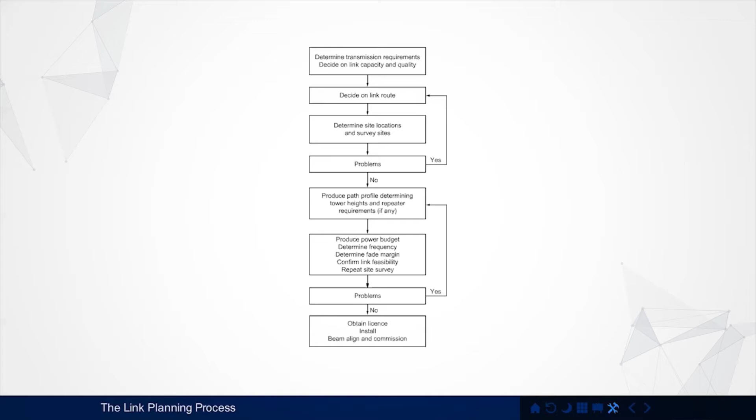Multiple steps, with some iteration in the various steps, but K-factor relates to this stage of the process, where we're trying to determine tower heights and antenna heights, and indeed the feasibility of the link. Will the two radio antennas at either end of the link be able to see each other in radio terms? Can I establish a connection between these two antennas? Is there anything in the way? Can I clear obstructions? That is, in essence, the profiling process: determining tower heights, antenna heights, and the feasibility of the link from a clearance perspective.

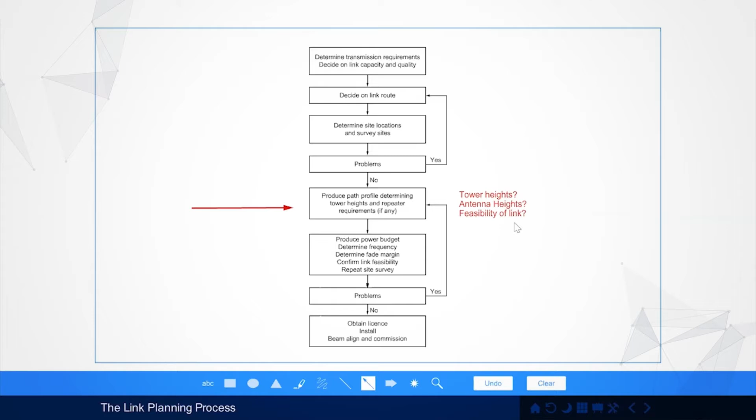Okay, what I'm now going to do is jump to this slide here. Our radio signal is going to propagate through the Earth's atmosphere. Those of you who've been radio engineering for some time, either mobile coverage planning or link planning, will be aware that the medium we use to carry our radio signals is, of course, a natural medium. Being a natural medium, it is not stable. It doesn't behave consistently in one particular way. The atmospheric conditions change over the day, over an hour, over the seasons. If you recollect your physics lessons at school, you might remember refractive index of a medium, denoted by a number. If the refractive index of the medium was 1, an electromagnetic wave propagating through that medium will travel in a straight line. It will not refract, it will not bend, it will not curve.

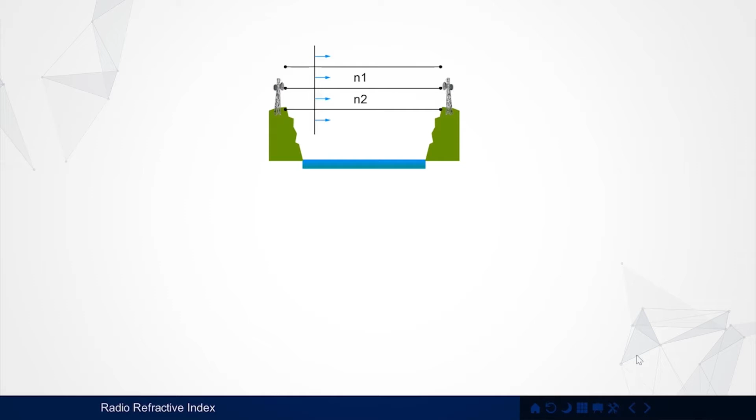As the Earth's atmosphere is not a stable medium, the conditions of that medium will change, and that will cause a change in the refractive index. So sometimes, in a quite simple model here, the higher altitude air will be thinner - I'll dive into this a little bit deeper shortly - and the lower air will be thicker. This, of course, will cause a bend, a refractive element in the radio signal's propagation. It will bend towards the Earth. We consider this thin air above, thicker air below as normal conditions, and that will create a degree of refraction of the radio wave.

Sometimes those conditions will change though, and we get some strange abnormalities, in which case the thicker air can be at the top and the thinner air at the bottom, in which case the refraction will trend upwards. So you can imagine if you have two radio antennas, one at each end of the link, the trajectory of the radio beam between them will be bending, refracting to a degree, up or down, and that will fluctuate through an hour, through a day, and across the year. As radio planners, we need to manage that - we need to incorporate that into our calculations.

Now, I'd like to draw a small distinction here between the scientist and the engineer. If there are any scientists out there, I'm not decrying or hopefully insulting anybody. But I would suggest to you, and I don't know if you agree with me on this, that the engineer is trying to take the scientific knowledge and create a model which will help him calculate, as a best educated, very educated guess, whether the link will perform adequately or not. So we're dealing with these scientific criteria in a practical engineering way, and we have to factor this into our link planning process.

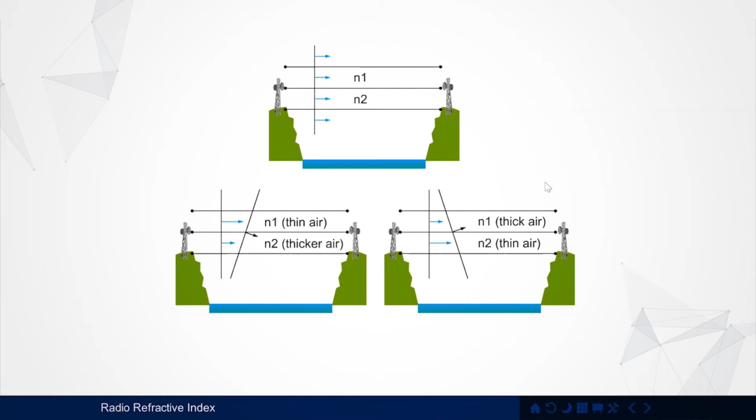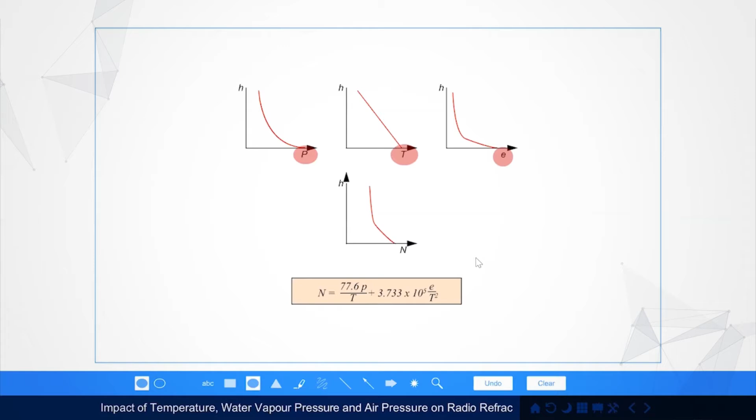Now let me go back a slide. As I've mentioned already, if the refractive index of a medium is 1, then an electromagnetic wave propagating through that medium would travel in a straight line. Now, interestingly enough, the value of n for...

As I've mentioned previously, if the refractive index of the medium, such as a vacuum or any medium the electromagnetic wave is propagating through, is 1, the electromagnetic wave will travel in a straight line.

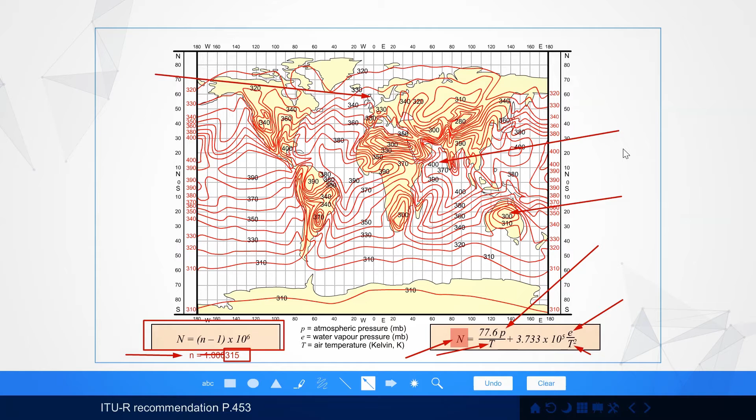It's not the absolute value that is of concern to radio engineers, not the absolute value of N. What is the main concern is the gradient, the change in N with altitude.

So if it was 340 at the Earth's surface, it would fall to 300 by the time we reached 1,000 meters. Over that 1 kilometer of the Earth's atmosphere, it's a linear fall in N under normal atmospheric conditions of about 40 units. So we decrease the value of N by 40 units over that 1,000 meters vertically through the Earth's atmosphere under standard atmospheric conditions, and that creates this refractive impact on the radio signal.

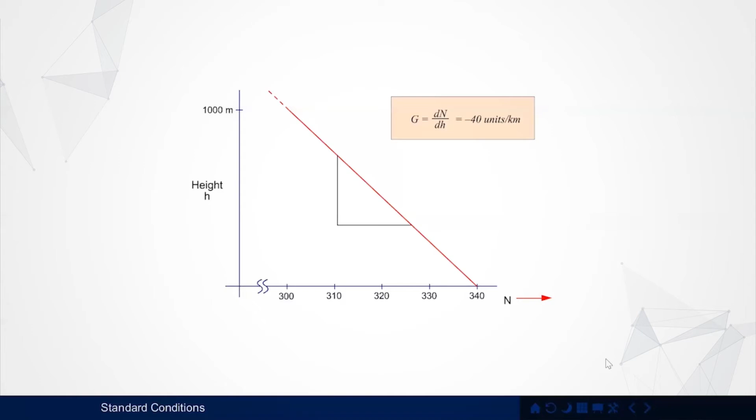So this is the K factor - by how much you must multiply the real Earth's radius to calculate an effective Earth's radius, so we can then draw the curvature of the Earth modified, so we can then draw the radio trajectory as a straight line.

So for the mean value of n, a gradient of n of 40 units across the surface of the Earth, then we take a K value of 1.33. So K is a mean value we can use in our link planning processes when we're plotting our profile. A K factor of 1.33.

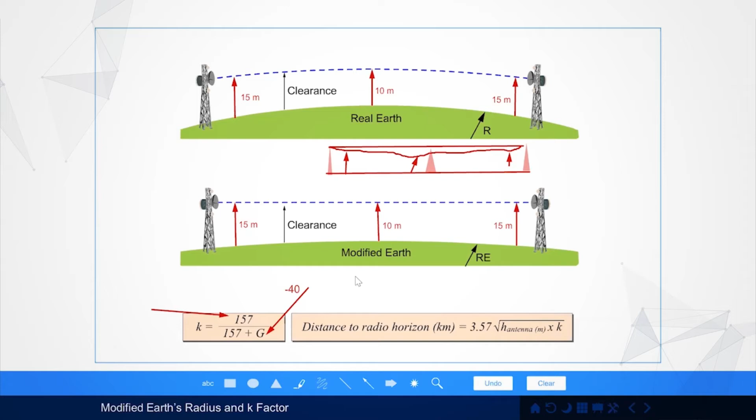Because the weather isn't stable, we're going to get changes in temperature, water vapor pressure, air pressure. We're going to get changes in N, so we're going to get changes in K. So if the K factor was 1 at my location, the meteorological conditions have dictated that the variations in air pressure, water vapor pressure, and temperature have created a gradient of 0. In other words, there is no change of n with altitude.

And in those instances, yes, the radio beam, as you can see in this diagram here, is going to travel in a straight line across the surface of the Earth. There's no change in n, so it's going to travel as a straight line.

Other meteorological conditions, which I've indicated here, like -40, the mean value across the Earth's surface, gives us a K factor of 4/3. So there you can see the curvature of that radio signal over a real Earth. And so on and so forth.

Now, what you will see is if K is infinity, the gradient of n falls by 157 units over 1,000 meters of altitude above the Earth's surface. If you recollect the formula for the gradient, it's 157 divided by 157 minus the gradient. So 157 minus 157 is 0, and 157 divided by 0 is infinity. So if K is infinity, the radio beam will travel exactly parallel to the Earth's surface.

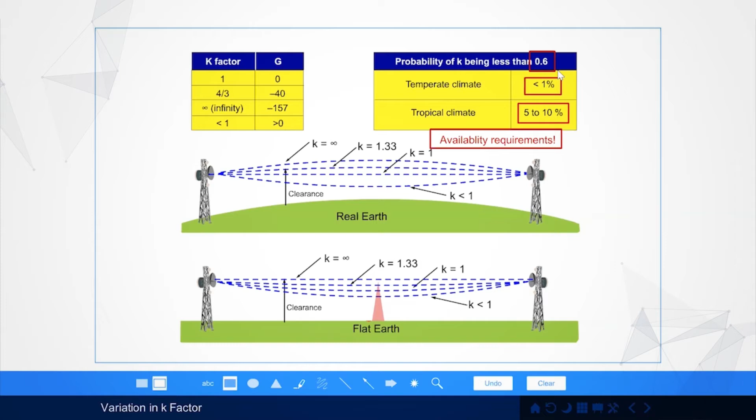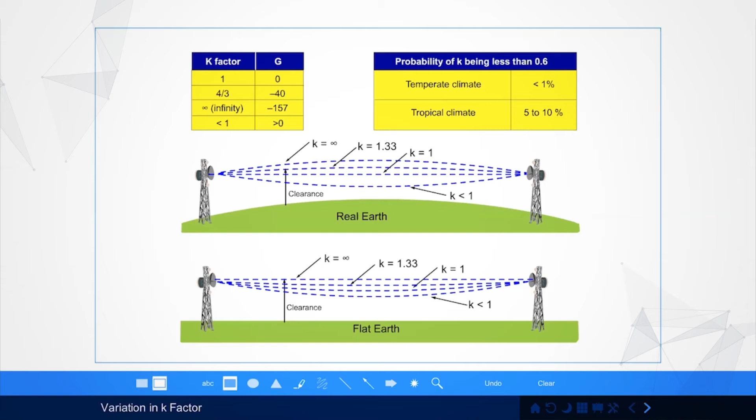Now, very briefly, just showing my age here. If we go back far enough, when I was learning link planning, we used paper like this. Can you believe it? We used graph paper like this. I'll spend 2 seconds on this, 10 seconds on this.

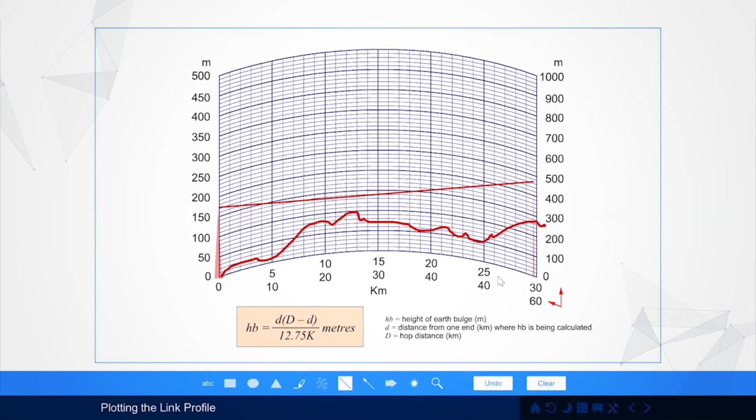So you would plot out your antenna heights on the chart here, and then you would draw the terrain profile in, and then you could draw the radio beam as a straight line. So we've actually curved the Earth's curvature to look like this. This is 4/3 Earth curvature graph paper, so it's curved graph paper for radio engineers.

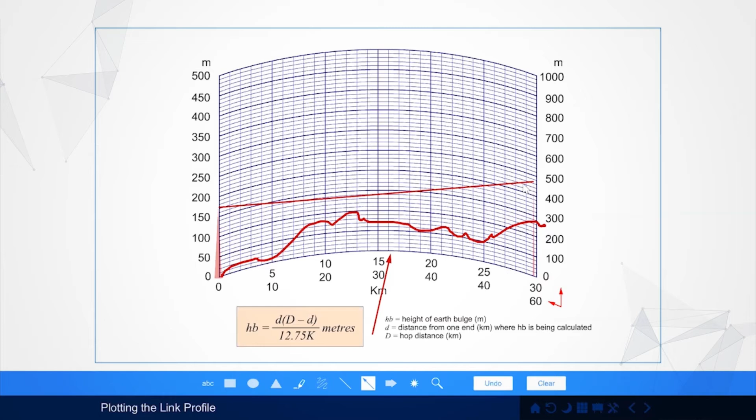We don't use flat Earth, we use curved Earth, altered curved Earth. This is mimicking the Earth's radius multiplied by the K factor. Plot the profile and then plot the trajectory of the radio beam as a straight line, and then we can work out our antenna heights. I'll leave that one with you - we've got software now. Okay, let me move on.

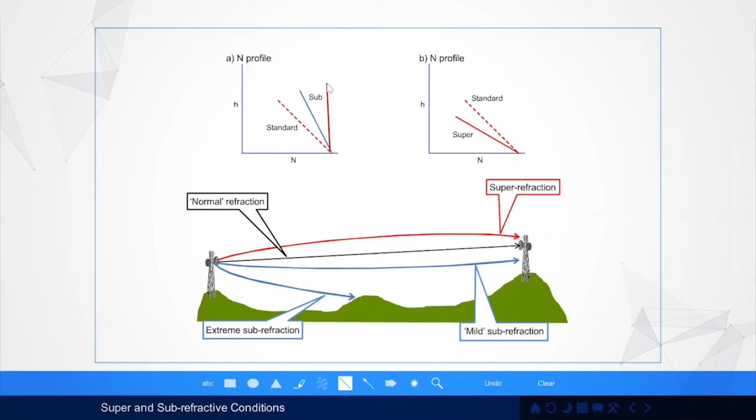It goes over there, that can be disastrous, and this can be disastrous down here. So we can see as this changes, the trajectory of the radio beam will change. That means it'll bend more downwards, or it might overshoot our dish or undershoot our dish, or even disastrously, we can get effects like this taking place.

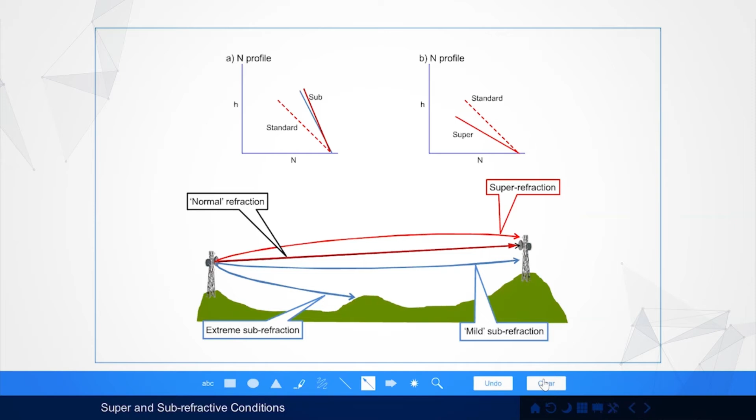Now, the man in the street might say, well, if your radio connection was directly like that, and then the weather changed and it did this or it did this, surely you've lost your link. Now, we don't need to panic. We don't need to panic because over the page...

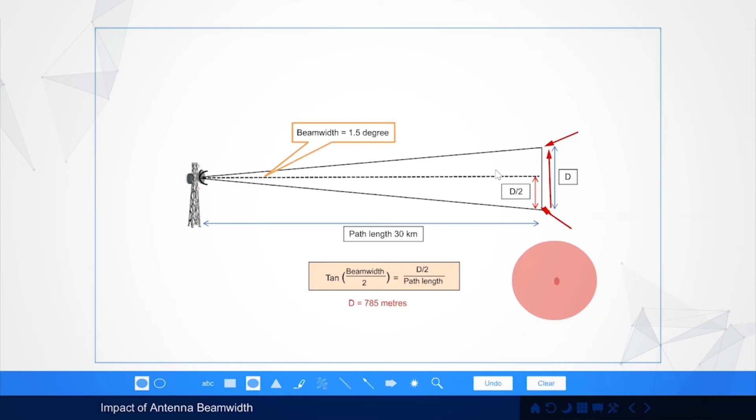Quick, simple mathematics, you can see in this case here, and only this case - you could calculate this for all of your links if you really wanted to - but can you see that distance there, D, is actually 785 meters. So arriving at my dish, I have a circular received electromagnetic field spread over 785 meters with my very small 0.3 meter or 1.2 meter dish stuck in the middle there. So of course I can tolerate some deviation, some refraction up or down is not going to have a major impact upon the performance of my link, as long as it's within reasonable limits.

Okay, so don't panic, the link will still work. Okay, moving on.

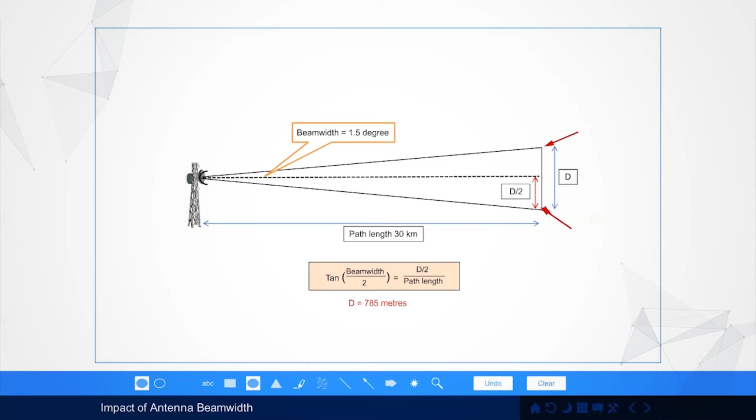I now want to look at clearance. How do we determine clearance? And you might have heard this, if you've been planning for a while, you'll have heard of Fresnel zones, and I'm gonna touch on that topic now. Okay, I'm aware of time, I really do need to move on, but I don't mind overshooting. If you guys can hang around for a while, I'll just carry on.

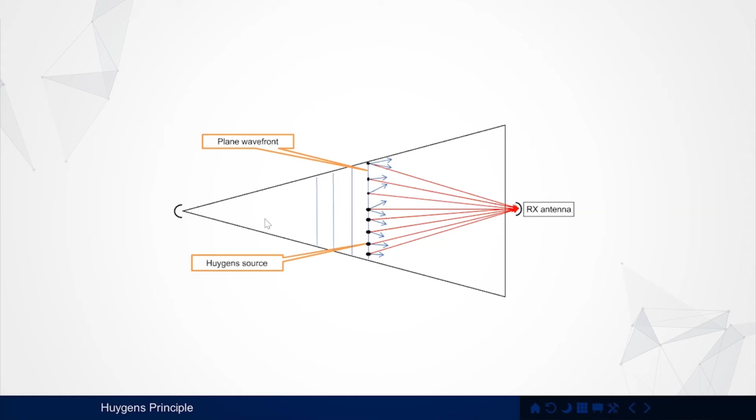Christian Huygens, a Dutch scientist, was trying to prove how light traveled from A to B, and he came up with this theory, which is that as the light moves, which is an EM wave, it'll travel a certain distance, arrive at a certain point, and he theorized that this front of the waveform consisted of an infinite number of light sources, which then radiated outwards and built up the next part of the wavefront. Okay, that was his theory, and that's fine, that's okay.

Now, Augustin Jean Fresnel, him of Fresnel zone fame, was tasked with designing highly efficient lighthouses for the French government, and so he wanted to know also how light traveled. So he said, okay, if this is my light bulb here, and this is the eye of the receiver of the light over here, then if Huygens is right, then the observer will see the light arrive, but some of that light will have arrived from another source, and that source is a different path length.

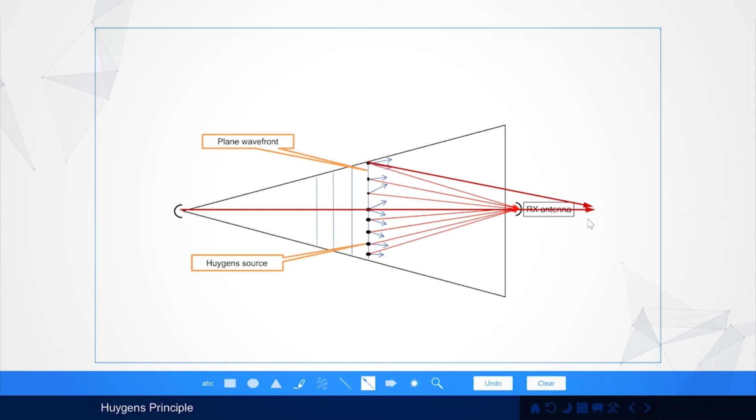So the light from this source might be out of phase with the light on the main bore. He theorized that we receive so much light that actually it's not as bright as it could have been, because we're receiving some out of phase light. So what he did was engage in some deep mathematical thought and came up with Fresnel zones, saying that he could predict where these sources of out of phase light are.

So he created lenses which blocked out, in effect, minimized the impact of those out of phase sources by creating very clever lenses on the light. And of course his light was much brighter than that had been experienced by anybody before from any lighthouse across the planet.

Now we can apply this theory to our clearance, because what we can do is say okay, if there is an object in the way, then maybe if I make my object just clip that first Fresnel zone there, then energy diffracted down here will be out of phase energy, and energy obstructed here will be out of phase energy. So if I let that object just clip the Fresnel zone, my received signal strength should actually rise slightly. And indeed it does.

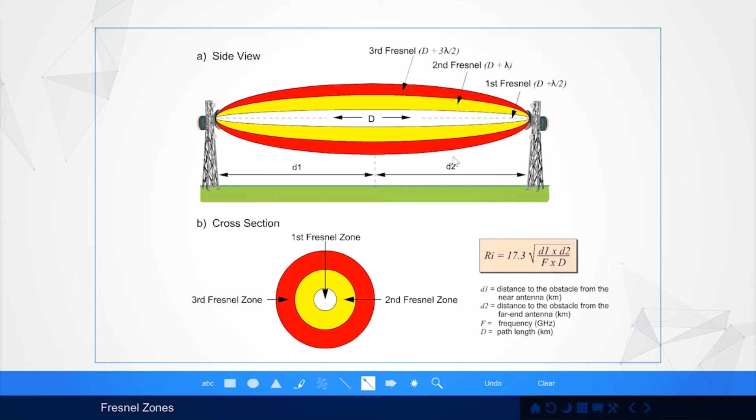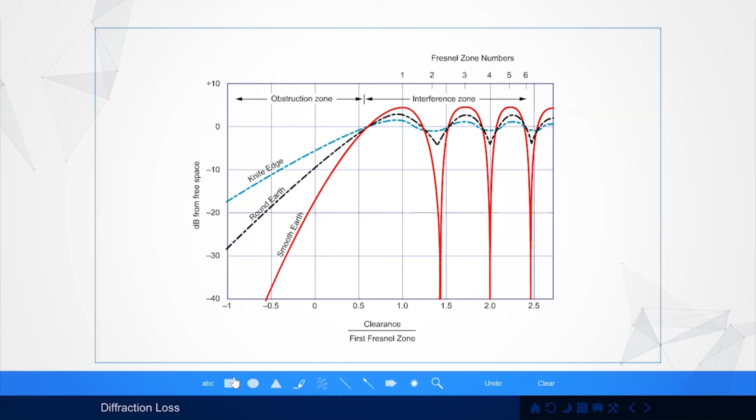But I've mentioned the topic now, which is diffraction. So if I go over the page here, we can relate diffraction loss to the clearance above a specific object or obstruction on our path. But what we have to do is relate the actual physical clearance, the distance we're able to clear the obstacle by, and relate that to first Fresnel zone radius.

So we calculate this ratio here. For example, if I clear the obstacle by an amount exactly equal to the first Fresnel zone radius, then this ratio will be 1.

And if we glance up here to the chart, let's just take any of these obstacles. A knife edge obstacle is the blue line. A round earth, a smooth earth, is the red line. But let's just take the knife edge, for example. You can see we get a slight lift in received signal strength above free space, in dBs from free space. It actually lifts by 2 to 3 dBs. So we get almost a doubling of received power because we're obstructing the out of phase power.

Another point of note: if we look here around about 0.6-ish of a first Fresnel zone radius and draw a line up from there, you can see around about 0.6 of a Fresnel zone clearance, we equate to free space loss. So we can equate a value of clearance we try to achieve to a Fresnel zone radius. I hope that makes sense.

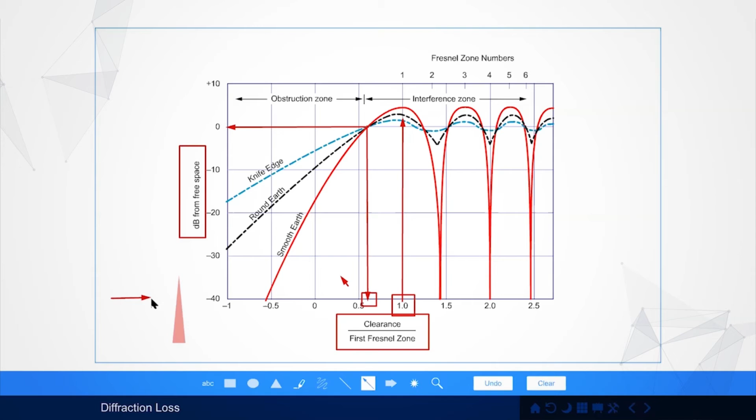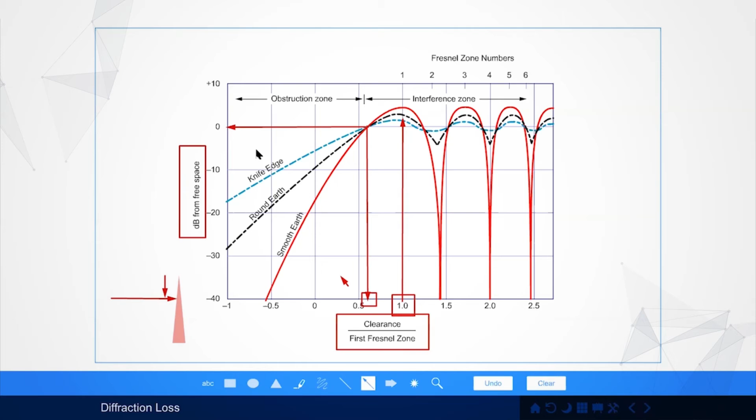Of course, when we go below a certain clearance criteria, if the ratio decreases, we can get some serious damage caused to our received signal strength. So if we go below the obstacle, we are so many portions of a Fresnel zone below the top of the object. We put that distance into the formula, the ratio as a negative value, and we end up with a negative ratio clearance, and we can see some damage caused to our signal by that lack of clearance.

So by how much do I need to clear an obstacle? By how much do I need to clear an obstacle? Well, we have various rules, various guidelines to help us determine by how much we should clear an obstacle.

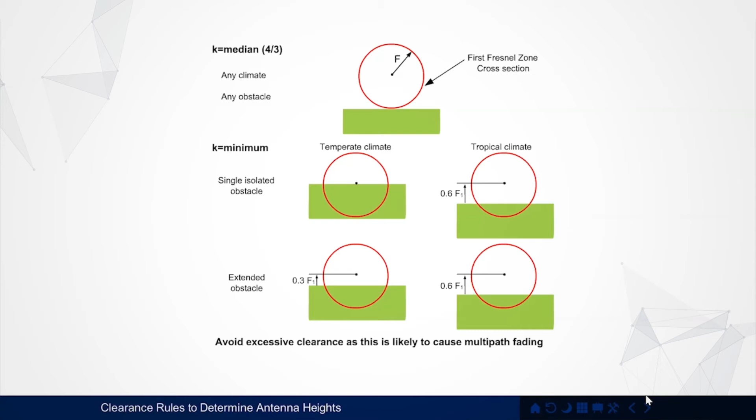Now, which rules you use will depend upon the way you operate. You might have in-house rules. You might follow international recommendations by the ITU-R, or you might have to follow your national regulations.

A general rule of thumb: wherever you're operating, whatever obstacle you have, knife edge or round edge, if the only value of K you can use is the median value, 4/3, then try to leave the first Fresnel zone clear. Try to achieve objects just clipping it as a target, but the point is it must be clear.

We use this value when you have no detailed knowledge of local meteorological conditions, to help determine the lowest K you might expect to see. If you do have knowledge of that minimum K, the current ITU guidelines say if it's a single isolated obstacle in a temperate climate, you can graze that obstacle. You'll experience a slight loss in received signal strength, but this shouldn't worry you or damage the performance of your link.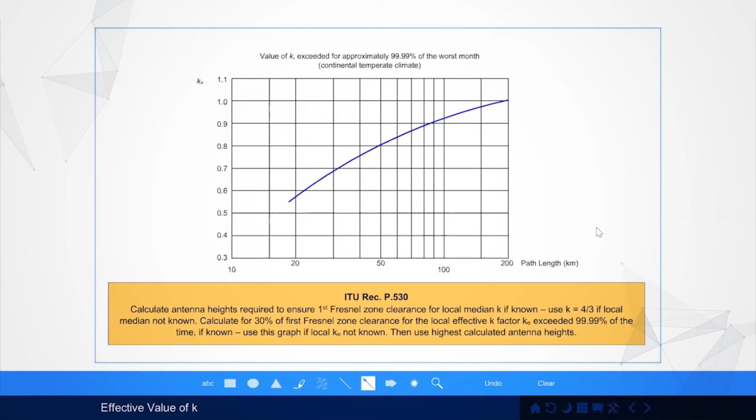Okay, hang on one second - hope you're still with me. I've covered clearance, so now I'm going to take a quick look at reflection.

When looking at reflections, it's the nature of the point we reflect from that gives us an idea of how much danger we're in. Anything smooth and flat, particularly wet, is a danger area - so of course the sea is a danger area. If a surface is very smooth, the reflective properties of that signal from that point - we call that specular reflection.

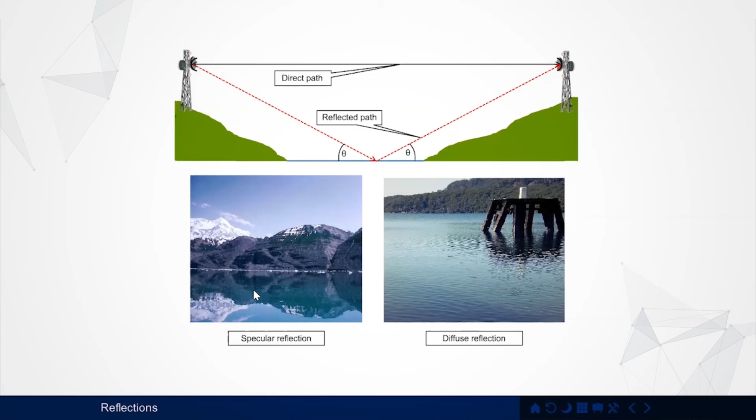There's my classic postcard picture - everything is reflected, all in phase, a beautiful picture. If the surface is not smooth, and it's actually quite rough terrain, then the reflection will be distinctly different. There'll be some scattering as well, and we call that diffuse reflection. So we've got specular and diffuse reflection.

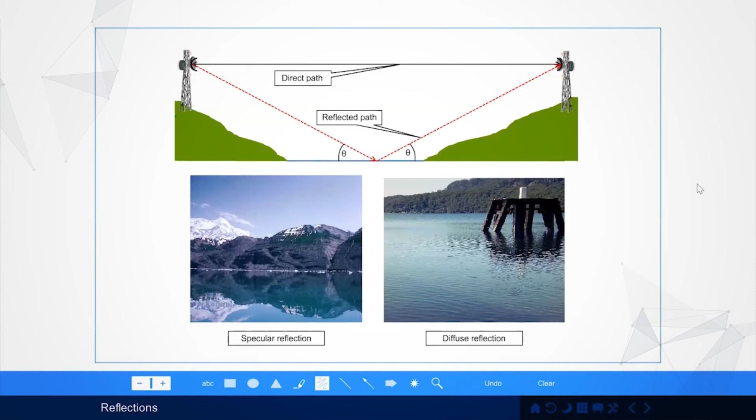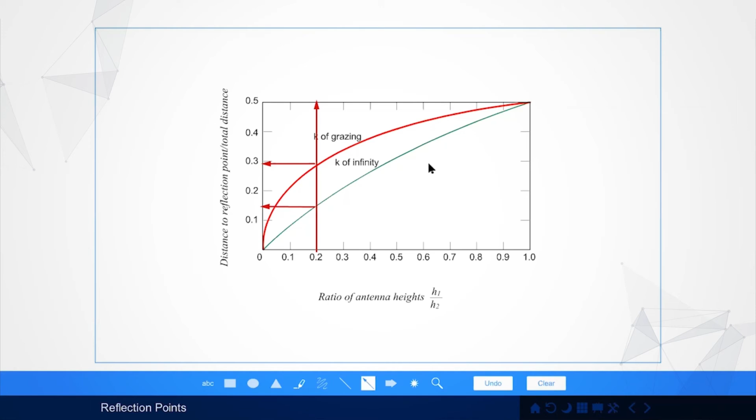Once again, go back to the old days before we had software. What we had to do was take our two extreme values of K, work out our ratio of antenna heights. Let's say it was 0.2, and then look across this curve, and we could see that from about 0.15 to 0.3 of the path length was our reflective danger area. I'll leave that with you. We don't use those things anymore because we've got software.

I'll cover this rather quickly. To identify a reflection area, we employ some relatively simple geometry. Your mathematical ability might be absolutely brilliant, or if you're a bit maths averse, don't worry about this. The software will do it for you.

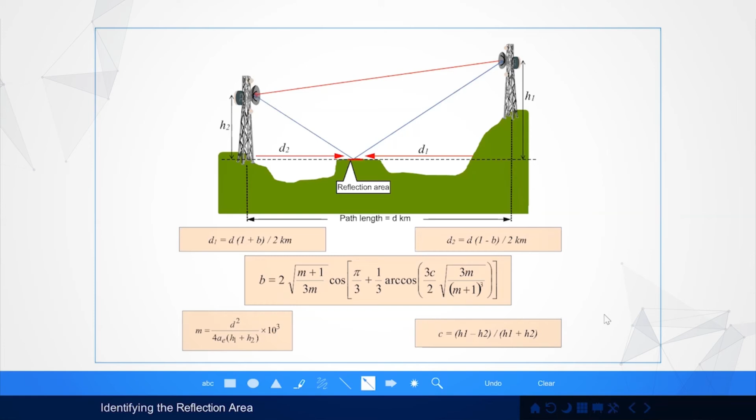Hopefully I'll clarify that shortly. If you're interested, there's some other mathematics you can use to determine the antenna heights above a sloped surface, but I won't dwell on that now. That's just another bit of geometry, really.

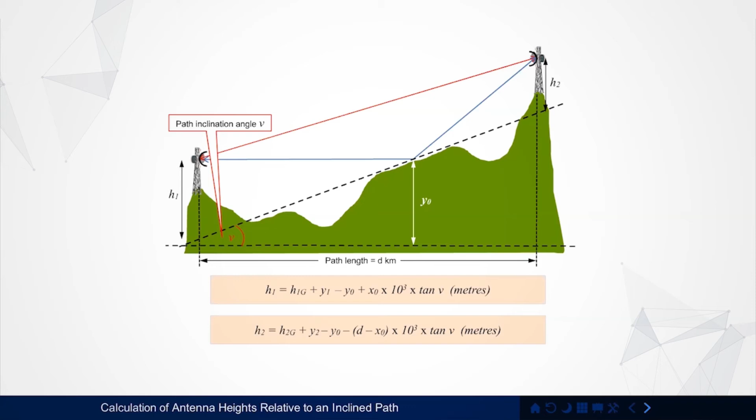So let's give you a real-ish example. Here you can see I've got this sloping surface. I've worked out my reflection area point using those previous rather complicated calculations, and there's my point of reflection. What I would do then is look at that reflection area and determine the nature of the terrain. So if that was a really smooth, flat surface, I'd be worried. If it was rocky with trees on it, I'd be less concerned.

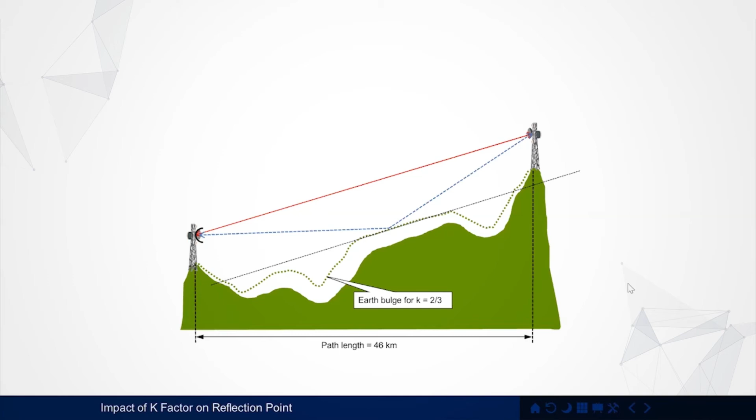What I've done here is calculated this value with K as 4/3. Now, if I take the same link and calculate that for K equals 2/3, a 0.66 K factor, that means the Earth's radius is smaller, so the Earth will bulge higher - it'll bulge higher because the radius is smaller. The Earth has a radius 0.66 of normal, which gives a sharper curve, so the Earth bulges up, and you can see the reflection point has moved. So by scoping over a range of K factors, I can determine my reflection area - this is for 2/3, and this is for 4/3, and I can see my reflection area.

Now that could have an impact on my link. 10 dBs, you might say, well, if you've got a 10 dB fade margin and that causes your link to be unavailable, then I'm sorry, you haven't designed your link very well. And I would agree with you - a 10 dB fade margin is ludicrous, it's far too small. But don't forget, in the radio environment, we're usually dealing with a combination of circumstances.

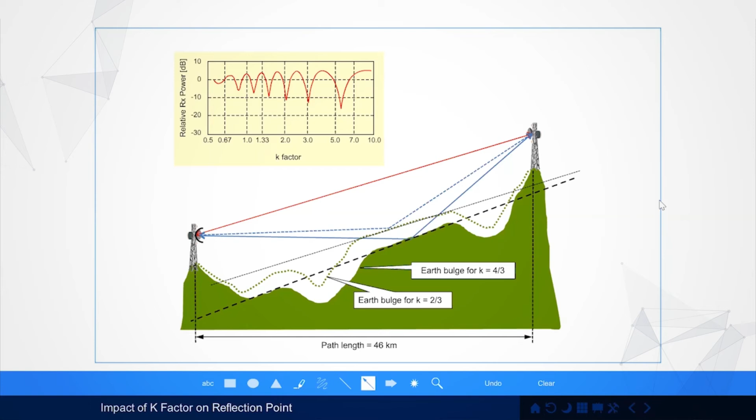Okay, let me move on. I hope you're still with me.

Now, something else we have to factor in from our reflective point is, don't forget, reflective signals will diverge because the Earth is a curve. It's convex. So if the radio energy comes down here, these black lines here, and hits the Earth, there'll be some sort of spreading of the signal as it moves away. So the RF will diverge away from that reflective point.

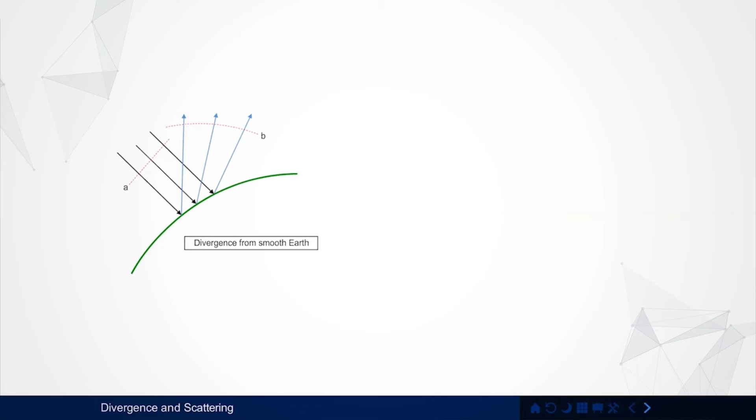Now that's from a smooth surface. Most of us in the real world, most of our links probably go over some sort of real terrain. So if you apply some sort of rough terrain over this smooth Earth surface to mimic reality, then we can see not only will we get divergence, we will also get scattering. So to determine the impact of this reflective signal, we probably need to take into account the divergence and the scattering.

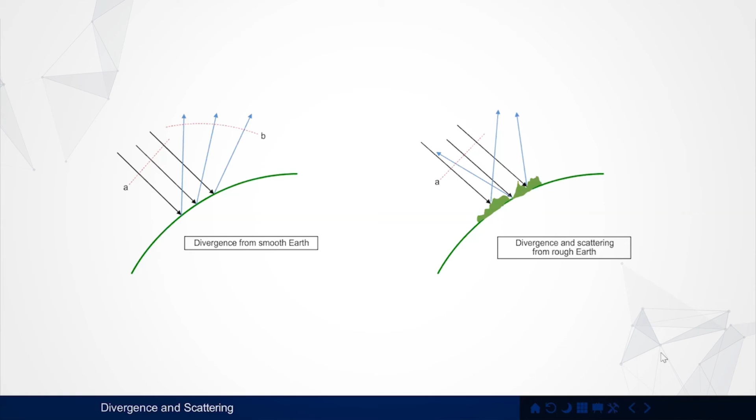Now, our good friends at the ITU help us calculate the effective reflection coefficient of this particular point on the Earth's surface. You might notice in the title of this slide, it says 'and why we use software.' So what we need to do is work - and I'll explain why in a second, you'll see why in a second - we need to calculate the actual effective reflection coefficient from that point on the Earth's surface.

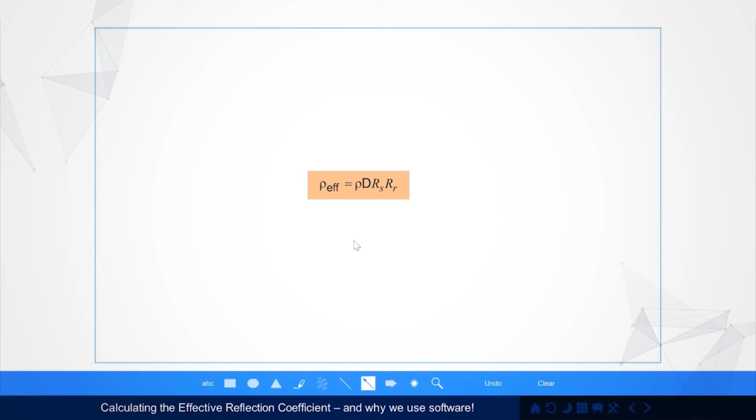And they came up with this rather simple calculation here. I'll just let you know that this value here is the reflection coefficient of the Earth's surface. This is what we call a divergence factor. This is called a specular reflection factor. And this is called a surface roughness factor. So can you see they've factored into the formula everything I've talked about so far?

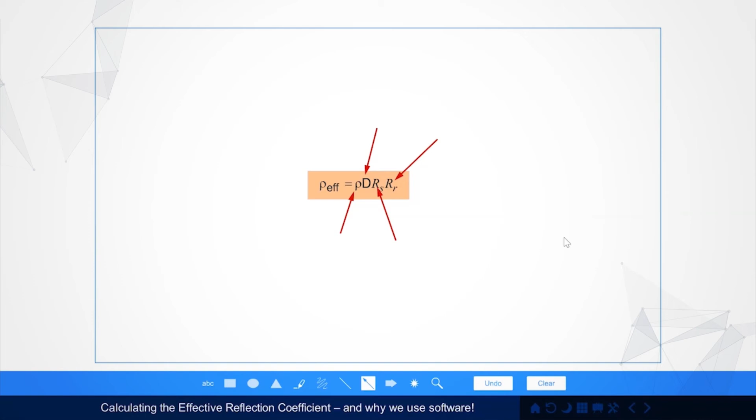All well and good. So now I can hear you cry, where do we get these numbers from, Carl? Please tell us. Well, here we go down the nightmare road. So to calculate these values, we need to do a fairly significant series of calculations. Don't panic.

So first up then, how do I calculate the reflection coefficient of the Earth's surface? Well, I need to know certain things like the complex permittivity of the Earth's surface, that value there, the relative permittivity of the Earth's surface. Some of you might remember these values from your radio and physics theory back in the day, and you might have sat in class saying, when will I ever need this? Well, here you go. And values like this, the conductivity of the Earth's surface.

And I can imagine you guys sat there now throwing your hands in the air saying, well, where am I going to get these values from? Where do I get these values from? I'll never be able to do this. Please notice the title of the slide: and why we use software.

Okay, why am I showing you this? Have you noticed down the bottom here? It sneaks in again - we need to factor in the modified Earth's radius. Of course we do, because as we factor in K factor, we're actually saying that we think the Earth is going up and down as the weather changes. The reality, of course, is that it's not - it's the radio trajectory that's changing, coming closer to or further away from the Earth's surface as the weather changes. So we need to factor that into this calculation as well.

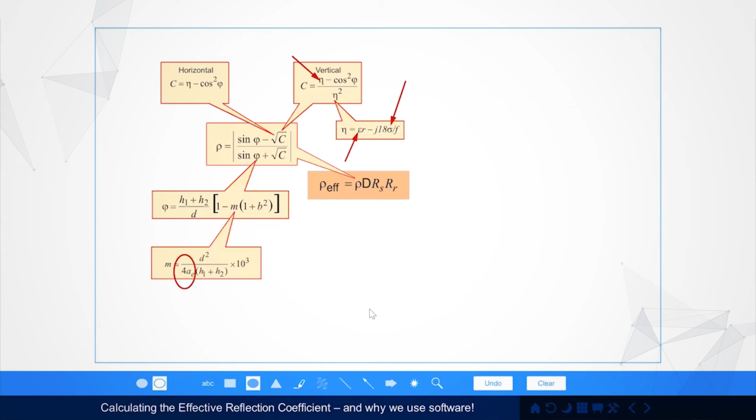And then we proceed through the other parts of this calculation. I won't dwell on these, you'll be glad to hear - it gets worse and worse. But of course, before you panic, a modern planning tool will incorporate all of these values - permittivity, conductivity, and so on and so forth - which are all available from the ITU. So they'll put them into their planning tool, and when this formula is activated, then we will factor these into the calculation.

So at this point, I'm going to remove myself from these slides and briefly open up a radio planning tool to illustrate a link. This is a link I planned, and it actually goes across the sea, as you can hopefully observe.

It's roughly 33 kilometers long, and I've asked it to plan the trajectory of the radio wave for two K factors, shown here on this chart: 1.33 and 0.66, blue and green respectively. It's shown me the clearance of the edge of that Fresnel zone above the Earth's surface for these two particular K factors, so it's determined that this link will be okay.

I've cleared the obstacle, which in this case is the sea. Now, funnily enough, I actually prefer a flat Earth and curved radio waves - if that's not intuitive to you, I apologize. Your planning tool might show you a curved Earth with two different curvatures and two different straight radio trajectories. In my case, though, I can see I've got clearance.

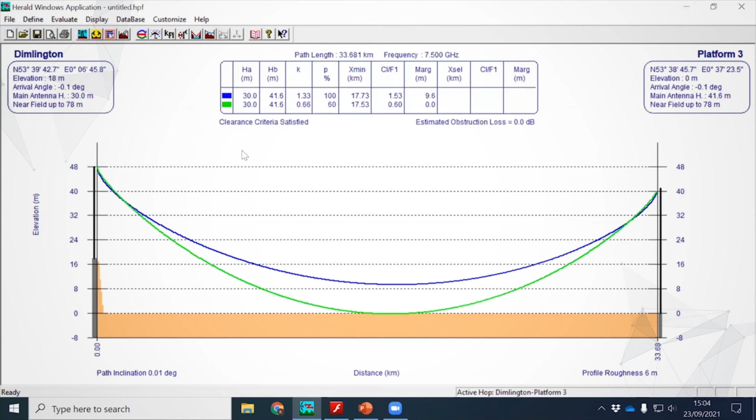But at least now I'm aware of what I'm likely to observe. One second - okay, cheers, Ian. No worries.

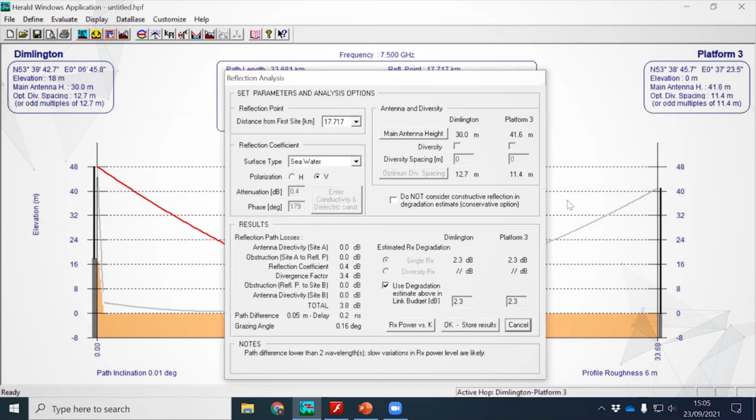Okay, that will do there. Of course, I haven't got time to dwell on this, but because it's over sea, don't forget you should also factor in the tide change. If this is a 10-meter tide, a high tide is going to be up here somewhere, and that might give a different kind of problem. We need to factor that in and think about that, but for now we'll leave it and move on to the last part of this session.

Okay, I've only slightly overshot the hour, but hey ho, who could have predicted a fire alarm, eh? I still can't believe that actually happened.

So what I'm going to do is go back to my main menu here. I'm going to open diversity systems, because what I'm suggesting now is, let's say the negative impact on my power budget and availability figures of reflections is so severe, my only option is to deploy diversity. Now, there are various flavors of diversity available to me - I'm going to talk about space diversity only.

With space diversity, what we're trying to achieve is the following: using two antennas, can I optimize the spacing between them to ensure, as much as possible, that if this antenna is receiving a strong signal, the other will be receiving a weak signal, and vice versa? Why will it be weak? Because the reflective conditions cause these two signals to cancel, giving me a weak signal on this antenna, while hopefully they add on this other antenna.

Now, if this is tidal water, that will fluctuate - sometimes this will cancel and that will add, sometimes that will add and this will cancel. What I'm trying to do is optimize the spacing between these two antennas so that when one is fading, the other one is hopefully rising, and vice versa. So I need to determine this antenna spacing.

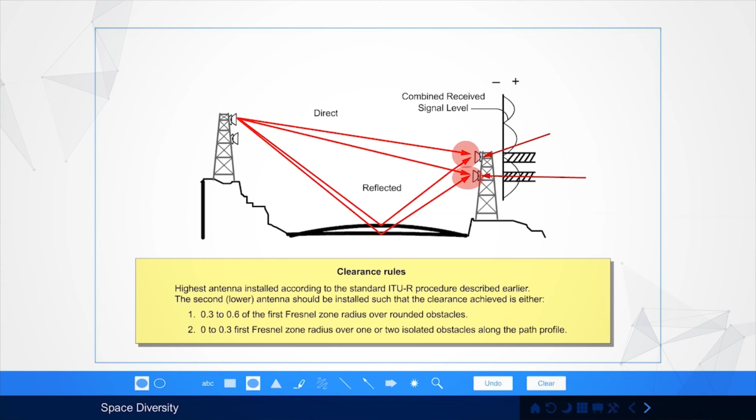Now, once again, our friends at the ITU have given us a model to help us calculate this. What they do is say, okay, it's easier, using some relatively straightforward geometry, to calculate the distance between two points of minima, or two points of maxima, or two points of minima - it's easier to calculate those two.

Once you've calculated those two values, all you need to do is halve them. If you halve that distance, when one antenna is at maximum, hopefully the other will be at minimum, and vice versa. So when determining your spacing, you calculate this value, then halve it, or use 1.5 times that, or 2.5 times that - in other words, it's always an odd multiple. That's how far we need to space apart our antennas for optimal performance.

And have you noticed what's crept into the formula here? Our old friend K. So K creeps in, and we have to factor that in when we're calculating our diversity antenna spacings.

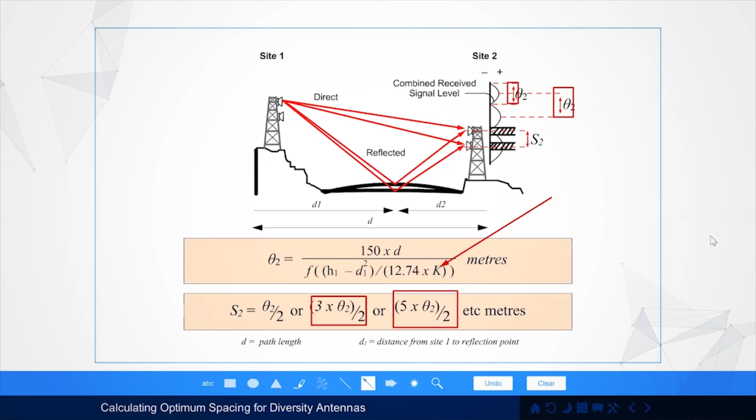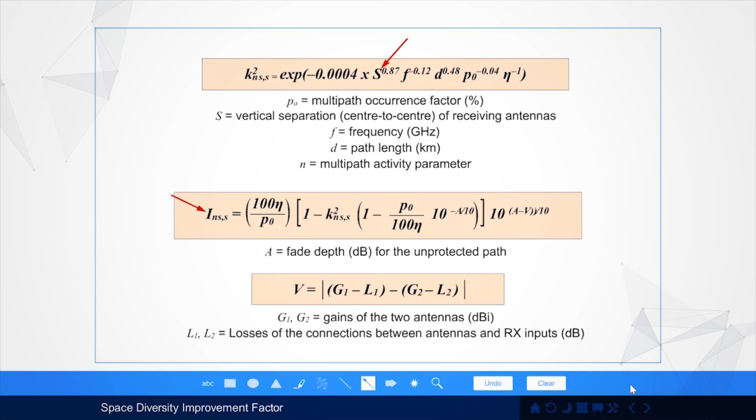Once we've calculated our spacings, I'll do one more slide. We can use formulae like this, which will be buried in the software. We place our spacing there, and from this we can determine our diversity improvement factor. I won't dwell on this slide, but I wanted to show how it fits in.

Okay, so yeah, people are leaving now because I've overshot the time due to the fire alarm, but never mind.

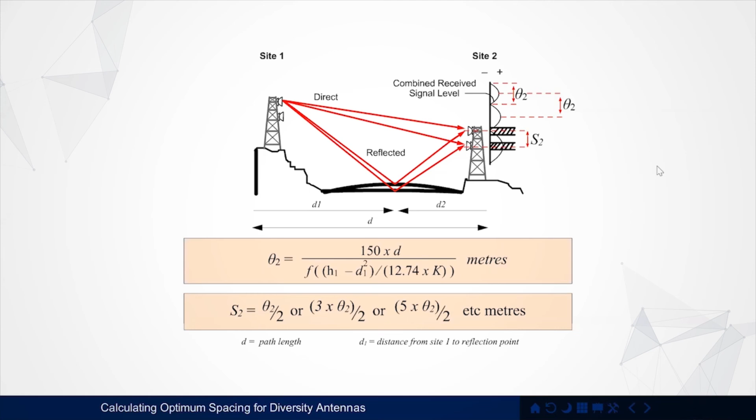So the last thing I'd like to display to those of you who've managed to stay is the following: let's go back to the planning tool, take my link here, and say this link is really badly damaged and I need to deploy diversity.

So what I would do is deploy diversity antennas. I'm not explaining the planning tool itself, but I'm going to activate my two diversity antennas. I've randomly placed them 5 meters apart - just randomly chosen a 5 meter diversity spacing. So I press OK.

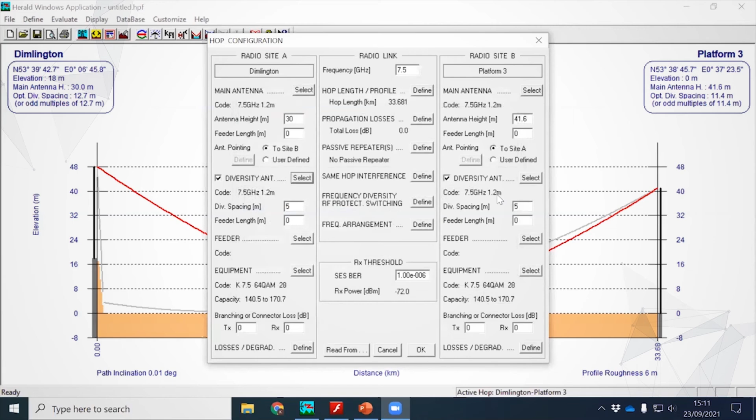Okay, I need to select an antenna. Bear with me - I'll go for 1.2 meters, the same as the original antenna. I've now selected my antennas, and I can now go and evaluate my reflections again.

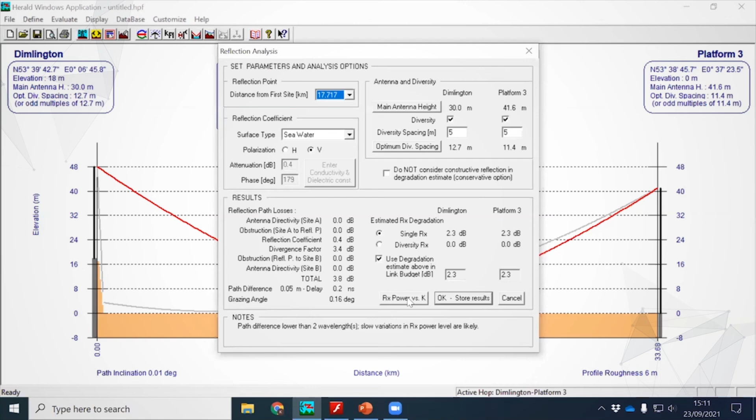I can evaluate my reflections again, and analyze those reflections, now including the diversity antennas. So I check that value of received power versus K again. You can see now I've got two curves here, one for the main antenna and one for the diversity antenna.

Are they doing a good enough job? I don't know - when this one dips, this one rises a bit and vice versa, but they don't particularly overlap very well in the right places. So the beauty of a planning tool is I can then ask it to optimize my diversity spacings.

It's done it for me - all those calculations I've just shown you, and taken you through over an hour, are done in a microsecond. That's the beauty of planning software.

And then I can now look at these curves again - look at that, how beautiful is that? When the main antenna dips, the diversity antenna improves, and when the diversity antenna dips, the main antenna improves. I've got a virtually perfect relationship between the two antennas where they compensate for each other.

But as you can see, the K factor is implicated in this - it's used in this. So I get this deep fade at a K factor of around 1.2, but the good news is my diversity antenna picks up the slack and gives me a decent received signal strength.

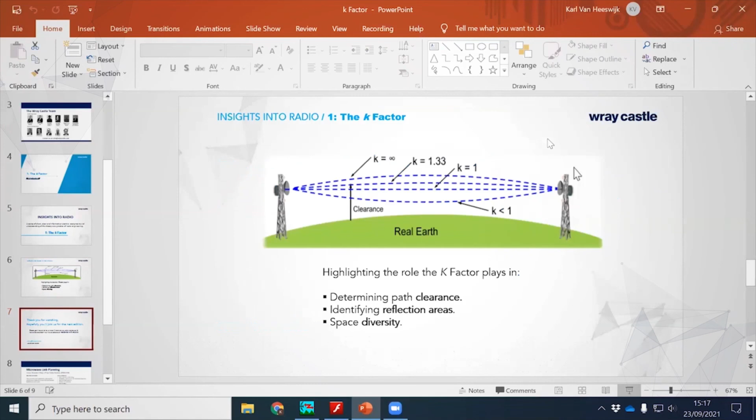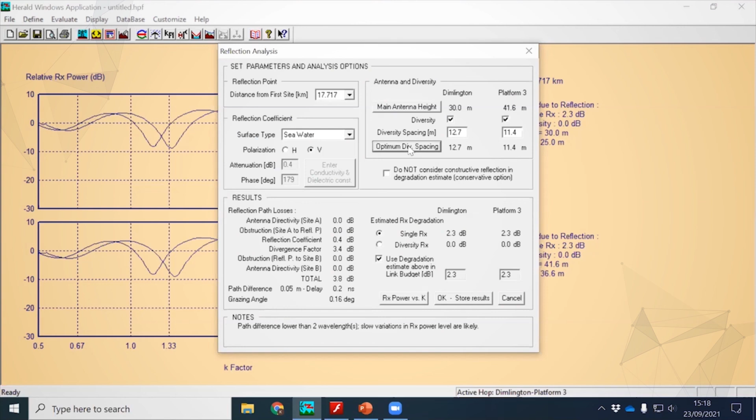Now, of course, that illustration there is my sort of 5 meter antenna spacing. Let me optimize again and then show you the curves, and hopefully you can see them change, watch them change once the antenna spacing is optimized. There you go, that's better, isn't it?

Let me go back to the chat. Okay, thank you, Christopher. Where was this one? Is there no phase shift from a reflection? Thank you, Marios, I hope you're still there. I apologize for the delay, but those two questions from Alex were linked. Actually, there might have been two different Alexes. Never mind. Okay, Marius, let me see.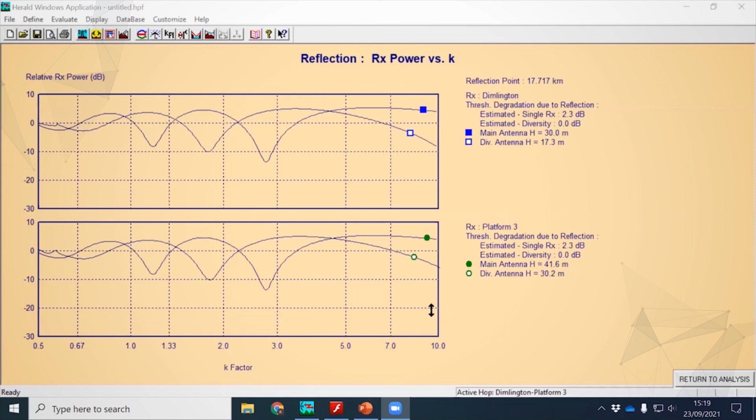Phase shift. Okay, let me go back to the slides. This is very interesting. Whenever I say that about radio engineering, some people laugh, but I don't know about you, I do find it very interesting.

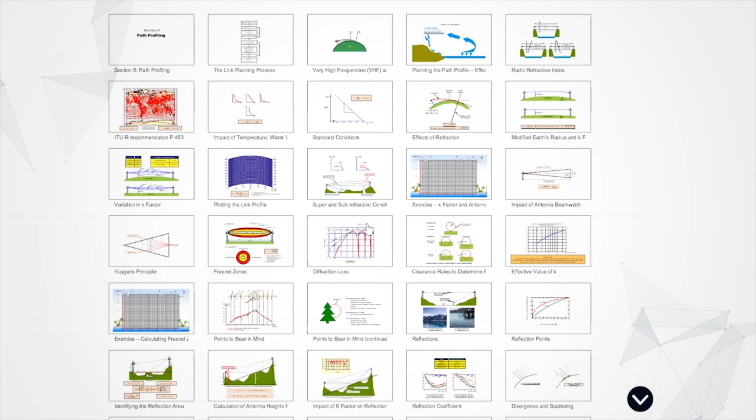Let me just sort out these slides for you, gents. Sorry, what slide did I want? This is about reflections. Here we go.